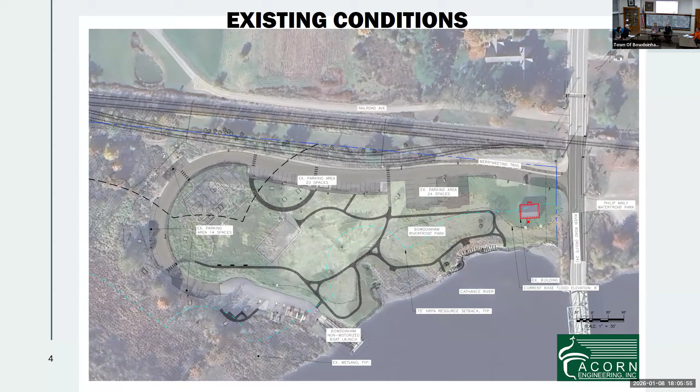For those not familiar with the site, we are looking at the existing structure at 8 River Road, which is technically part of the recently developed Riverfront Park. The park is still under construction, but now we're looking at potential options for what that house could be. If you want to move to the next slide.

Zooming in a little bit on the existing conditions, it's a little hard to see, but showing where the existing building is, and highlighting some of the flood and permitting considerations associated with the shoreland. There's an elevation 8 contour that wraps and touches the building, then heads back out towards River Road. That is an important elevation, as it's the designated special flood hazard area by FEMA.

So that is our flood zone, and right now the building is technically currently within it. We're looking at potential options to ideally get the building outside of it, so it's not subject to flooding requirements including additional flood insurance. But we're also looking at what we'd have to do if this building was to remain, to flood proof the structure and meet current shoreland regulations as well.

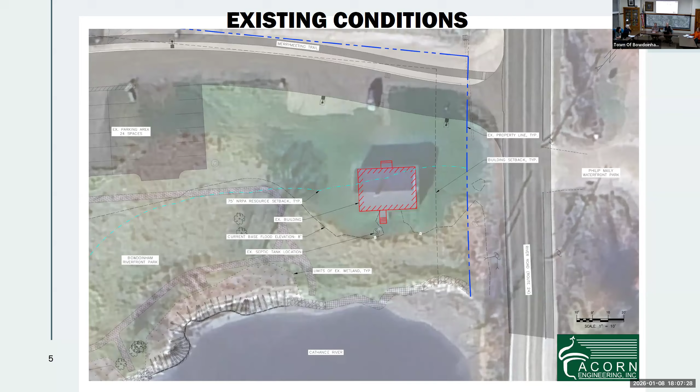The blue line is a 75-foot setback from the mean high water line of the river. That line is important as it's the jurisdictional setback associated with the DEP Natural Resource Protection Act, so there are implications of building and disturbing within that zone as well. If you want to flip to the next slide.

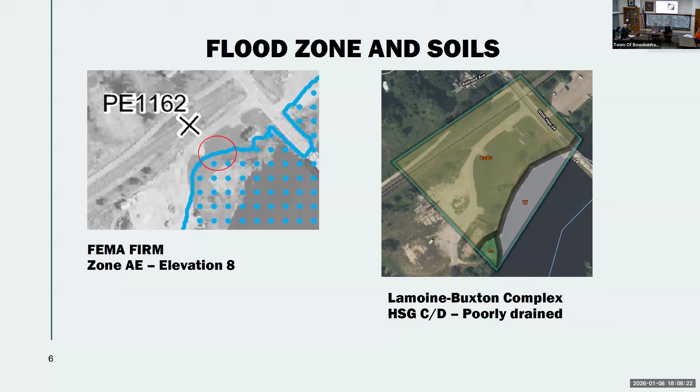Next slide. This is just showing what a potential building envelope could be. This is not a potential building dimension, but just showing areas where a building could theoretically be placed on the site. Within the 75-foot line, the blue line, you can see that portions of the existing building, or all of it, are highlighted, because it's a grandfathered use. We're allowed to utilize that grandfathered use to redevelop the building, if that's the direction it's headed. Otherwise, we're trying to limit our disturbance within that NRPA setback to outside that 75-foot line, which is why the majority of this building envelope is located outside of it.

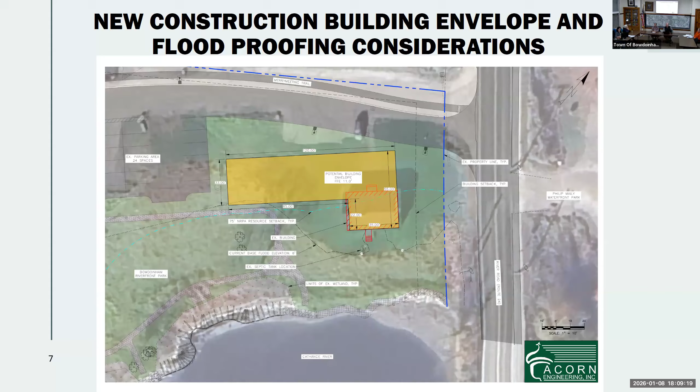If you want to flip to the next slide. So Ryan will touch on the architectural design, but what internally the town and our design team have talked about for potentially uses, and we'd like to welcome your feedback as well. But what we've heard is a new redevelopment of the structure could be a community or welcome center, a retail or rental space for people renting bikes or kayaks that want to go on the river or the Merrymeeting Trail, a potential use for a cafe, and then others that we're looking.

I will touch on before Ryan gets on, what we will be showing is the cafe, and that is due to the septic design. So the septic design is kind of the constraining factor in everything. As it's currently designed, we're only allowed so much flows that could go to that system.

So we're looking at the worst case scenario of what the potential maximum build out of the septic system itself would be, which would be a cafe restaurant because of the amount of flows associated with that and the higher strength waste associated with that. But we're open to all uses.

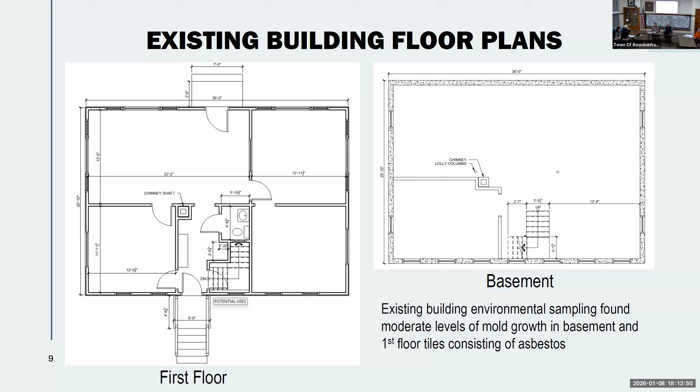Another option, as Pete had mentioned, is to look at building a new structure, and you'll see that actually in a second if you want to switch.

So some of the improvements we're talking about are making it handicap accessible. So you can see the ADA ramps, and potentially building a deck on the structure on the water side. That'd be nice. Energy efficiency improvements, new windows, siding, maybe a nice entry porch. So really trying to work with that existing structure, but make it a more modern, usable structure.

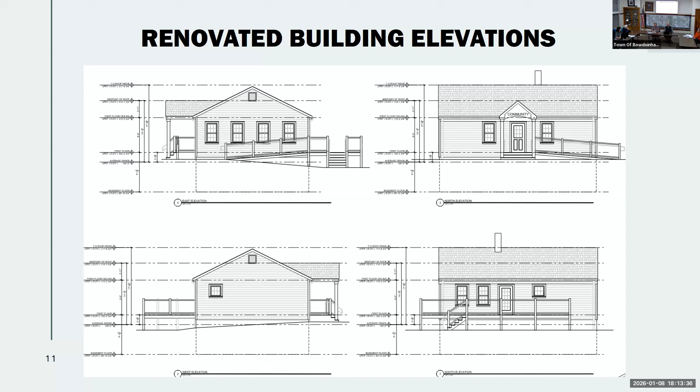There's obviously many other uses that could be in the space. But we're looking at providing a handicap accessible restroom, as well as a utility space that's outside the flood zone, which is another requirement. You definitely want your mechanicals out of that to protect the building.

Looking at the existing structure, the structural engineer said it was in average condition for its age. To renovate it into a use like this will take some reinforcement. We'll be modifying some bearing walls, so definitely some structural roof reinforcement, and like I mentioned, kind of a new slab on that existing foundation. So we're exploring that as one option.

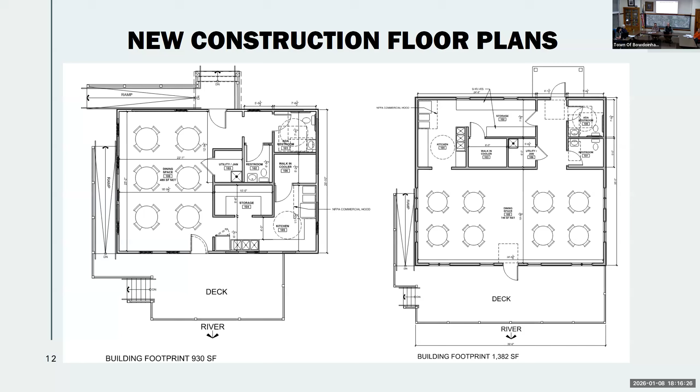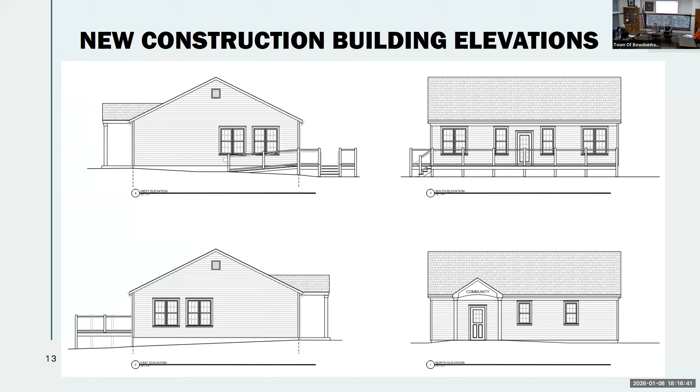I don't know if we had one more elevation page. Yeah, so these would be some elevations of that proposed new structure. As you can see, a pretty traditional design, gable roof, nice entry porch, and then that potential deck on the water side. So thank you.

Just next steps, as we progress, we'll be opening up a survey following this meeting. We're shooting for it to go live on the website on Monday, and have it open for a week, looking for additional feedback from you all and anyone else not able to attend. We'll then have a second public meeting incorporating the feedback we received today, at the end of February, February 25th at 6 p.m., same place, and there will be a Zoom option as well.

With that, we'd like to open it up to public comment.

Just a process point, is there a Zoom link working now? I'm getting some text from people who wanted to join. Kate Cutco's on it. Can you check your email, there's some people trying to join who emailed you, just send them the link. Sorry. I found the link because I have access to the host email, that's the only reason, it's not posted anywhere that I could find except in the host email itself. Sorry.

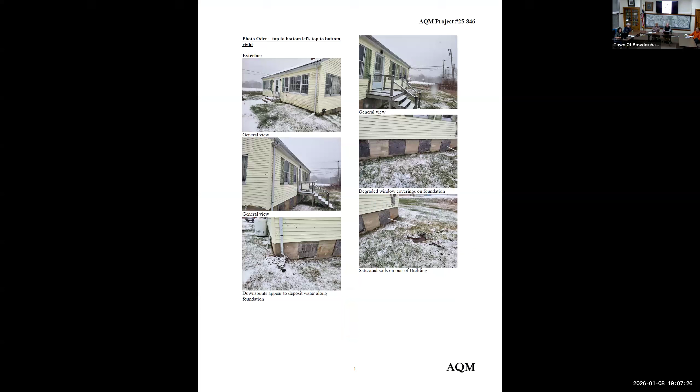Yeah, I mean the floor plan now is basically 4 spaces, if you will. Oh, actually they have nice images here, let me pull it up. I'm not sure I can zoom in any more than that. The image on the upper left is kind of the largest space as you walk in. You could imagine that's the size of a relatively large living room, for your perspective, and then the other 3 rooms are like the size of a bedroom. So just to put that in perspective, like 14 by 14 or 12 by 12 for the smaller ones, or maybe a 30 by something for the larger one.

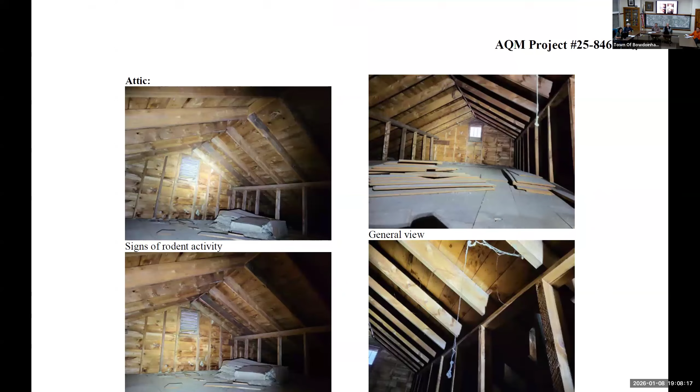Is the larger office on the side of the building, the front of the building? It's the non-water side. So is that all the way across the front? No, it's by the door side. It's 22 feet by 13 feet, that space, if you look at the second picture down. That was the waiting room, and there was a glass window where the cashier stayed when it was a bank, so you had a larger waiting area and then the office where they took the money. The office area behind that is very small, only 10 by 10.

So the reason I'm asking is we're talking about one retailer or one way to let them have some space, but it may be interesting for folks to think about 3 smaller concerns. Somebody that wanted an office might need a bedroom-size space, somebody doing waterfront rentals or exploration or guiding might also need a relatively small space, whereas we might still have room for history, nature, or a passive area.

Where we can talk about the history of Bowdoinham or what makes the Merrymeeting Bay so unique. There are lighthouse places that do that. So I just want to throw out that maybe one way to explore this is multiple spaces, like 2 revenue-producing and 1 revenue-neutral, and how that might be configured. I could see perhaps a small retail space, antiques, whatever, since it had an antique space there for a long time.

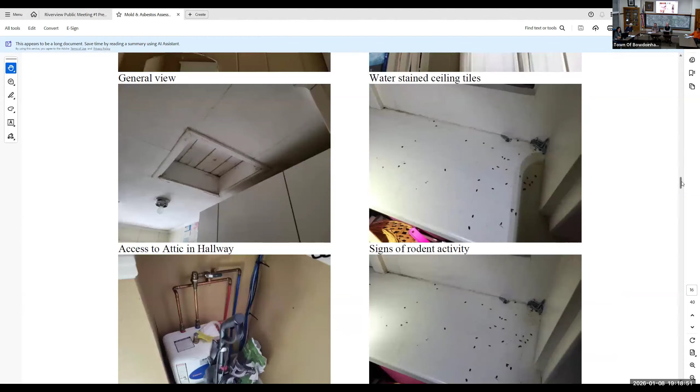What do we want to do with the building? The town still owns the building. We're still liable for what's going on in that building. So we need to take care of those issues first and then look the long range. Now, if we improve the building enough, yes, we can move the rent up. We haven't moved the rent up much to the tenant there because we know we're giving them a poor building. So those type of improvements, yes, we can recoup some of it, but some of it's our responsibility anyway.

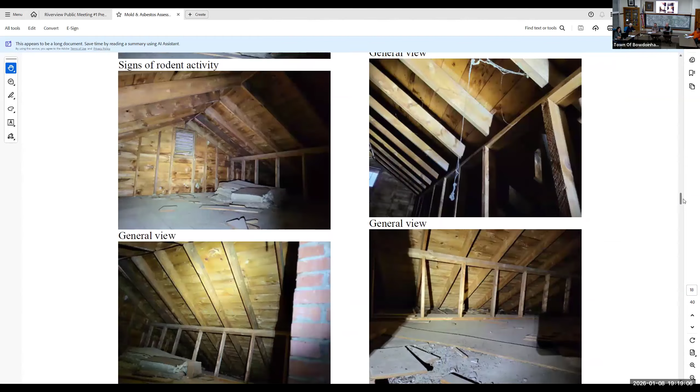Yeah, I mean, that's what we're kind of presenting as option one, rehabbing the existing building and having it a rentable space for the existing and or potential future tenant.

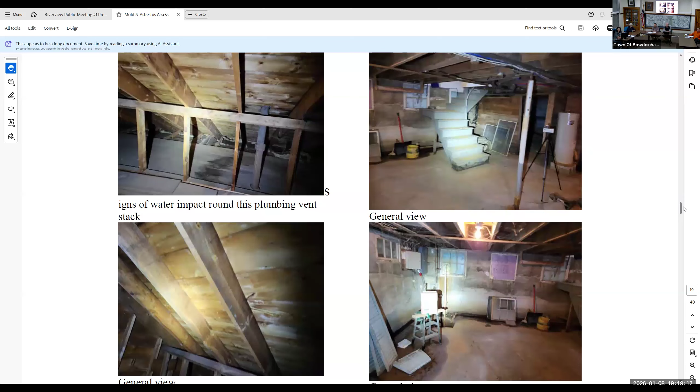How much are we thinking? 600. Yes, it's 600. Is it for the whole building or just one space in the building? The whole building. And they heat it, they pay electricity, so.

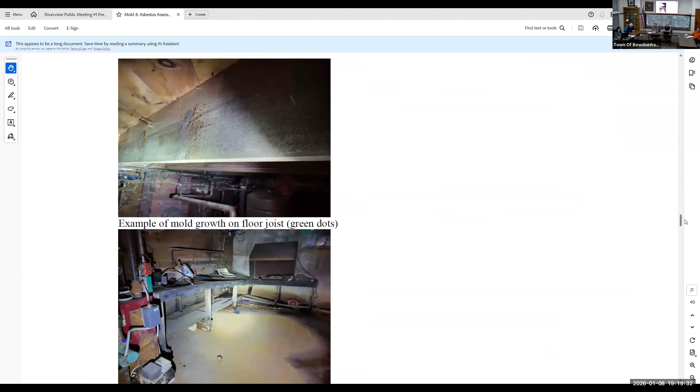So utilities are under them. Yep. And given all the windows and the single pane windows, I can't imagine what his heating costs really are because there's no insulation in the building. Very familiar with that. As you've noticed, a lot of things in the town built that time didn't have it.

A lot of water damage on that was done prior to the roof that was on about 4 years ago now, 4 or 5 years ago. The original roof was in bad shape. So the new roof, and so some of those, because nothing's been done to the building, those tiles have had stains in them for the last 10 years.

So I thought that was a good point that was just made about trying to really understand what the cost of a rehab would be.

Personally, when I look at the photos that I looked at this afternoon and what you've just put up there online, I do sort of look at it as, am I going to be able to find all the right parts to my old lawnmower? As opposed to, can I just go out and get a new lawnmower, hopefully make an assumption that my cost of maintaining it over time would not be that which would be associated with such an extensive rehab.